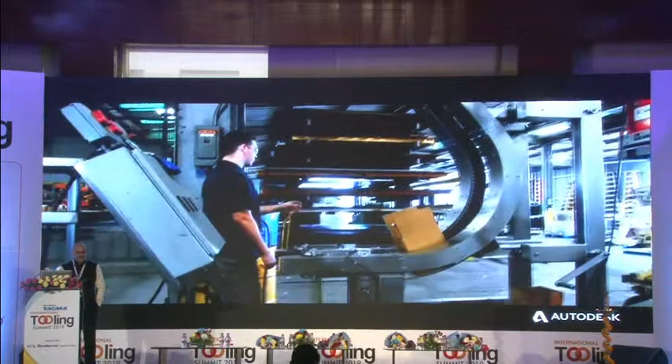So I'm sure if not for my voice, the audio in the video would have woken you up. So now that I have all of you attending to what I'm trying to say, every image, every video that you saw in that piece of video was work done by our customers, on our products. That's the kind of stuff people are doing, and that's what we call our vision, which is helping people to imagine, design, and make things.

And what I'm going to talk to you about today is where this future of making is headed. So ever since man came to earth, I think we've been prone to making things. We constantly are making things, whether we are at home or at work. And if you look at the IT domain, there had been a very simple view of how you make things.

So you have a man, you have a machine, and then you have an output called the product. It was basically a very linear cycle that the product used to follow. Then the product used to retire, and that was a fixed product value for every product. That's how making has evolved. And the output that you get in a linear process is something like what you see here.

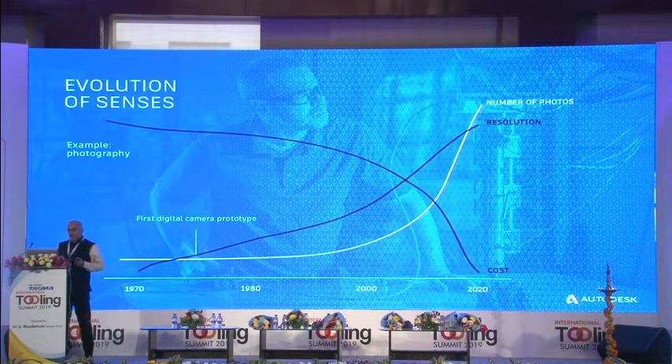But this has all started happening because technology is being forced by the senses, and technology is fast evolving. So basically it is us, the customers, who are demanding this, whether it's mass customization, personalization, smart technology, or synchronization, a real-time feel that we need. That is what is driving all this. And hence, advanced manufacturing, not mere manufacturing, real-time manufacturing is a reality. It's already there, and that's exactly what we say is going to be the future of making.

So what exactly is the future of making? You see this linear product life cycle. When you talk of the future of making, it is cyclical. It's a closed loop mechanism, and that is what companies are heading towards, with each function interconnected to the other.

Basically the product is offered as a service, and constantly you keep innovating based on feedback, looping it back into development, and hence getting a better product out of it. And that's what is happening, which basically results in a much better output, the output which the consumer wanted or desired.

So basically what we are talking about is a platform which has all the elements from design to make to use. It's a platform that companies will adopt, and it will be a closed loop mechanism that will ensure the product is constantly innovating based on what customers are asking for. At Autodesk we call it design, make, and use. That is what our products are moving towards, to ensure customers can leverage it to the fullest.

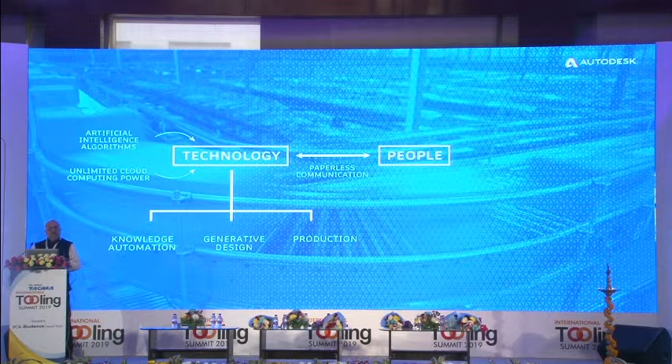So what's generative design? This is the crux of my presentation. In a traditional way of designing a product, a design engineer sketches out a few options and deliberates those options based on what you want to do with that design, how you want to machine it, what's the strength, what the priorities are. But the fact is you're starting with very limited options, based on what that human mind has to offer.

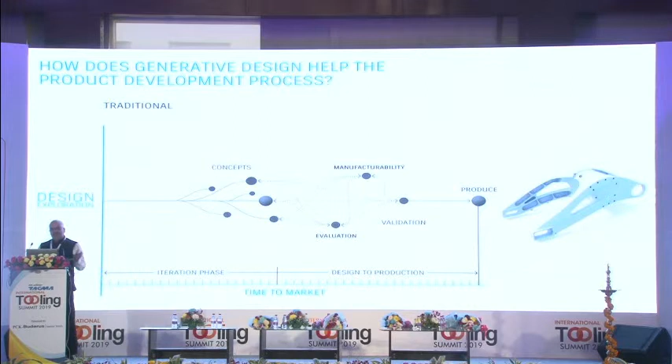And then you have the traditional processes that follow: manufacturability, evaluation, validation, and then production. Now imagine if there is a tool available which throws up thousands of designs based on parameters you have defined - based on material, machinability, temperature, tensile strength, whatever you may want. You define that, and the machine throws up thousands of designs to choose from, and that's where you start.

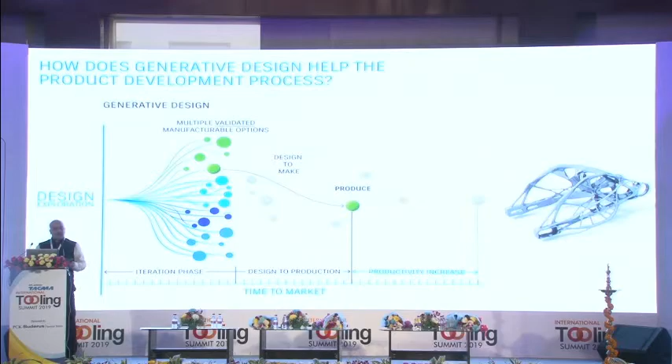And just see what happens on the x-axis: your entire process gets compressed, your time to market goes down drastically, and your efficiency and so on follows suit. So who does this affect? Believe me, everybody in this room, because design is the starting point of any innovation. Design is the starting point of anything we do in manufacturing. So it pretty much impacts all industries.

And how can you make the most use of it? You have to embrace it. And you would say, why is Pankaj saying you have to embrace it? Technology is there, people will embrace it. But the biggest problem is going to be how we look at things, how we change our mindsets, and how we make our customers change their mindsets. That will probably get covered in the last part of my presentation.

So basically, it's all about knowledge automation, generative design, and finally production. I want to quickly show you this is not theory, and I want to show you a case study of Airbus which will drive home exactly what I'm trying to say. So let's go through this case study, and then I'll get back.

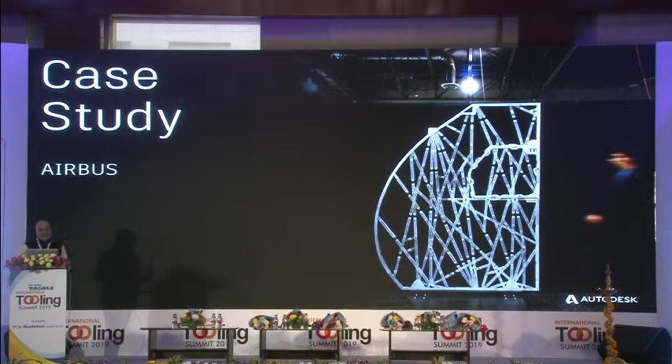This is a comment from a person at Airbus, talking of the design engineer being a design jockey, no longer a design engineer - meaning he has to handle and has the capability of judging which is the best design to pick, because his intelligence now has to move to picking the right design and not designing the right design.

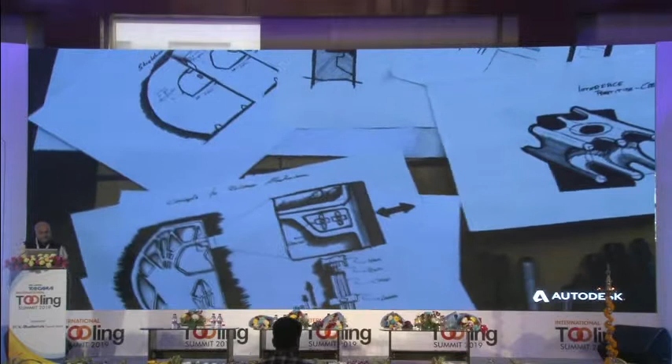We are committed to reduce greenhouse gas emissions by 50% until 2050. This requires us to develop new technologies which make airplanes much lighter. A lot of innovations happen behind the curtain. We have a dedicated lifecycle approach, a very holistic view, not only of the product itself but also the operations and how we manufacture the product. This enables us today to go a new way in airplane design, to use biological algorithms to go into a different kind of direction in how we design and manufacture components in the future, to come up with new design principles, to find out what makes sense in the future.

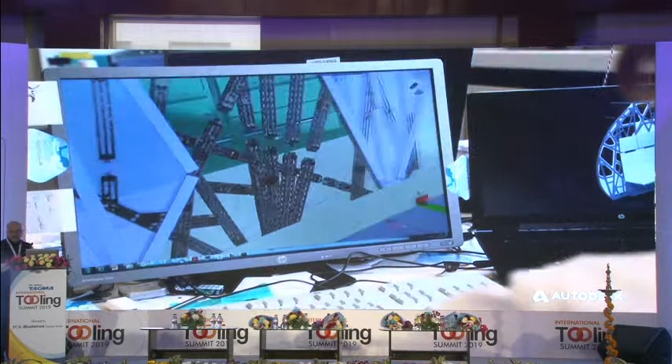We call it bionic. This is what nature has done for millions of years, that we are able to copy nature - I didn't expect that, to be honest. Certainly the bionic partition, as we call it, is also one product which has its roots in the biomimicry area. We have selected one of the most difficult structural components inside the A320 cabin. We can achieve this today simply because we combine generative design, 3D printing, and additive manufacturing. You just say what you want and you will get it from the software.

If you think about the future and our task for the future, the biggest thing means we have to reduce weight.

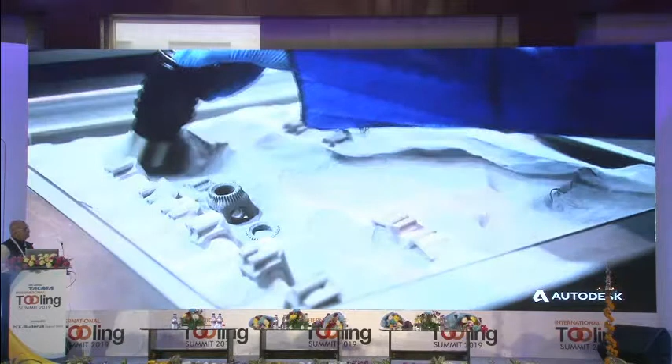With bionic structures, we have a weight reduction potential of 50%. We have up to 95% raw material use, and we have the chance to reduce the production steps by 50%. This is really a very big step for an aircraft builder, and this is just possible with generative design using Autodesk software. If this works, it works everywhere else.

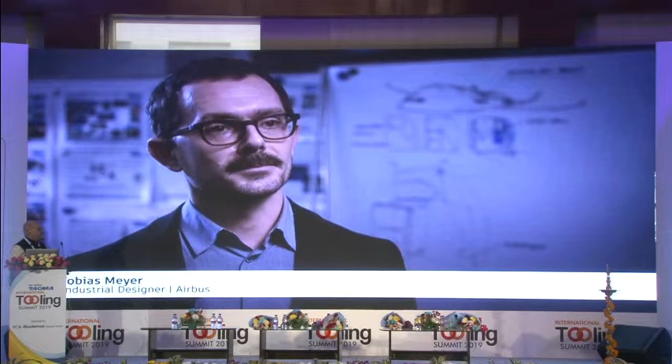Now, step by step, we start to look for more cabin parts and see where we can implement bionic design. I see here the biggest change I've ever seen. We have very long life products, you know. Each kilogram which we design in today costs fuel burn the next 25 years. It helps our customers, the airlines, and it helps the environment.

So just so that, I don't know how many of you caught those metrics, these were the achievements of just creating a partition through generative design. You can see for yourself, and those of you, I mean, most of you are in manufacturing, this is like music to your ears, or I'd say music to your eyes. So this is the kind of savings Airbus achieved by just adopting generative design and redesigning that partition panel which is there in every airplane, right? And all of us know these are the metrics which for the airplane industry matter a lot, whether it's CO2 emissions, fuel savings, and so on and so forth.

What are the main benefits? Very obvious. You have multiple design options. You have virtual global teams operating because this is a cloud offering. And you have a great technology that is kind of fast evolving and unconventional design.

So you would have heard this word constantly in that video called bionic. The beauty about generative design is it does not think straight line. It does not think the way humans think. It thinks the way nature thinks. And hence those structures that get created are inspired by nature. They are bionic in nature. So they might not be the most pretty to look at, but they must be exactly what you wanted it to be with respect to weight, size, pressure handling, material handling, machinability, whatsoever you may want, right? Coming back to what are the main challenges, and that's what I'll cover now, okay?

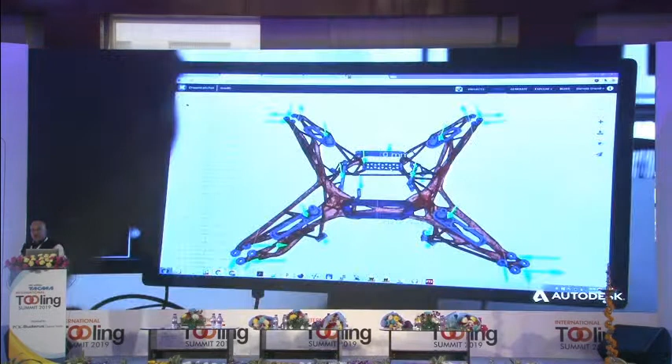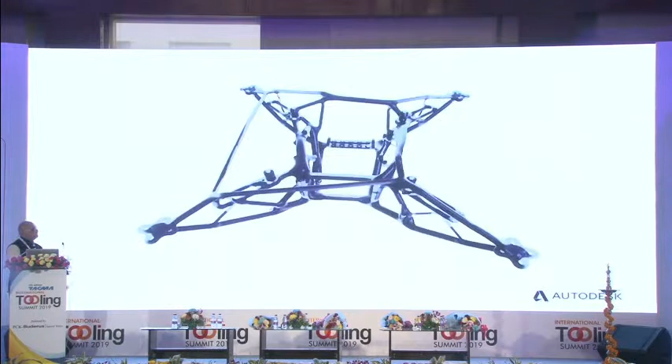But before that, what if you could come up with thousands of generative design options for a single concept, without drawing, all of which meet specific goals set by the designer? And from those options, pick the one design that delivers on the most important criteria, the design you couldn't possibly have imagined. This is generative design, a technology that harnesses massive computing power, creating forms with precise amounts of material only where needed, achieving maximum performance while wasting nothing.

But generative design can be about much more than simply turning out alternatives. Prototypes can be scanned and equipped with sensors that provide real-time performance data that can be looped back into the design process, so the object, in effect, co-designs itself. And depending on the material and method of manufacture chosen, the software can optimize the design for those choices.

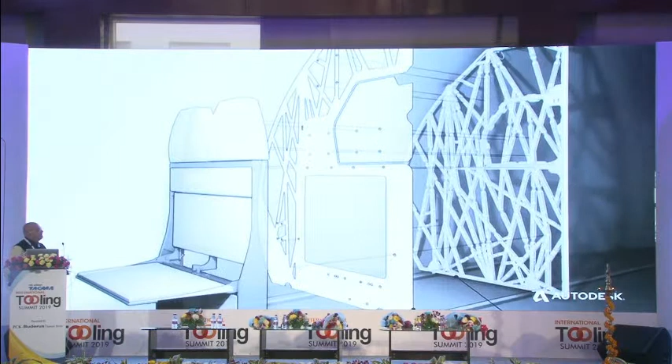In its search for the optimal design, generative design creates complex forms that would otherwise be impossible to make using traditional manufacturing methods. Now, with advancements in material science and the ability of 3D printers to print metal, companies like Airbus can create forms like this airplane partition panel that's half as heavy and just as strong. The result? Significant reduction in fuel costs and CO2 emissions.

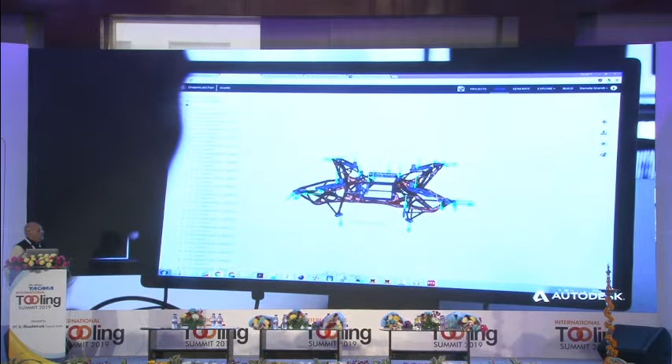The things that have limited us in the past, software, materials, manufacturing, no longer do so. With generative design, the world can look and perform any way we want it to. This is the next stage in the evolution of design, and it's happening now.

The beauty about generative design being that a typical 3D printing driven by an AI robot would print in parts, and then you would either join those parts through various forms. In generative design, depending on the machinability capabilities, you're creating a single structure, which I'm sure all of you would agree is a much stronger structure without any joints or anything, right?

So basically, what are the challenges, right? At the end of the day, it's we who are to use generative design. We as people need to use generative design. And basically, the typical thought that comes in a designer's mind is, is this technology going to replace me, right?

So let me also show you one more case study before I conclude my presentation. This is a very interesting case study of a seat bracket, the seat belt bracket that we use every day. And you should see what General Motors has done with generative design on that.

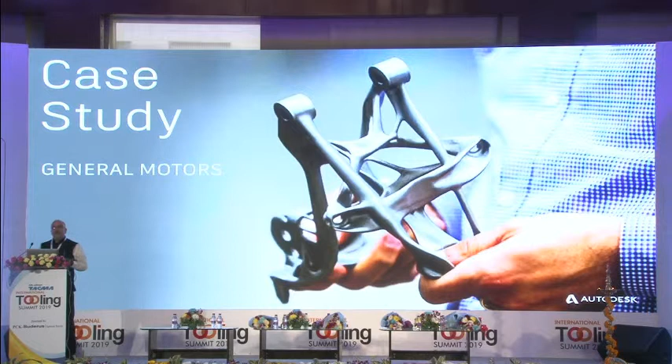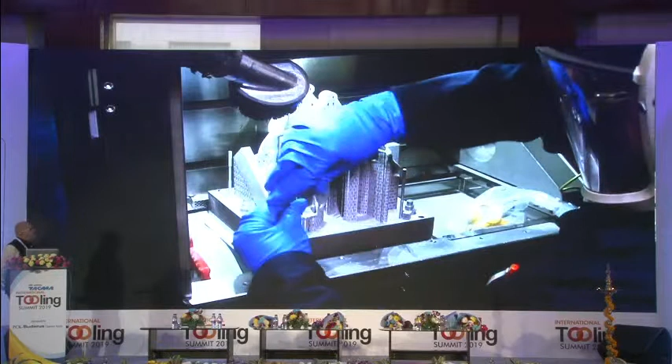There are many different ways to design for additive manufacturing, or more commonly known as 3D printing. One of those ways is generative design. It takes inputs of design constraints, load requirements, keep-out zones where material can't be, and generates thousands of different design solutions working with the software that a single designer or engineer couldn't come up with on their own. It's an expansion of our current capabilities, focused on lightweighting, new manufacturing processes, and designing and making our vehicles in a different way.

Autodesk is one of our valued partners as we go forward in the additive manufacturing space, helping us think differently, bringing an innovation culture, as well as tools for design for additive manufacturing.

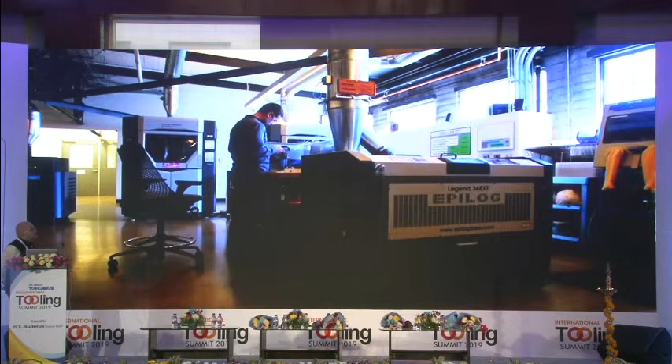One of the first parts we worked on in collaboration with Autodesk was a common rear seat bracket. This bracket consists of 8 pieces, welded and bolted together. We worked very hard to consolidate that part into one piece, something that can only be produced using additive manufacturing. We ended up saving 40% mass, and got that part consolidation from 8 parts down to 1.

The benefit is really being able to explore the design space in a much more efficient way than using a traditional approach. We get multiple designs within a short amount of time, a feasible solution to our problem, which could probably take a normal engineer weeks to figure out.

GM has traditionally always been a leading innovator in the industry, and it's great to see them adopting these new technologies and seeing how it applies to their business and their customers. We feel there are huge benefits today, but those benefits can really ramp up as we move into the future. The opportunities for GM around additive manufacturing are endless.

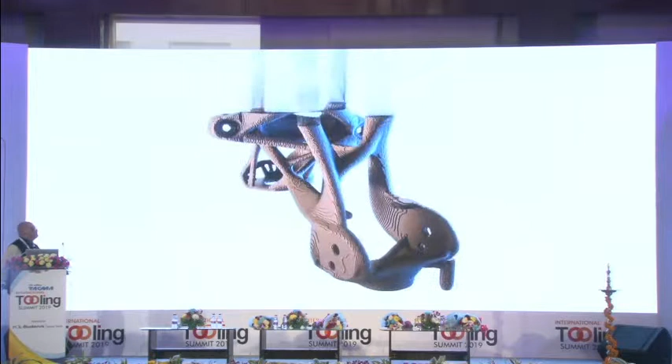I could have gone on and on with case studies. I have one from Black & Decker, and one from another company whose name I'm missing. There are about 3-4 more companies where we've created case studies which really drive home the point that this is a technology that needs to be adopted. And by whom? Believe me, it's pretty much in all the sectors.

Manufacturing is core to most businesses outside of services. So it impacts almost every sector, because every manufacturing process starts with a design which is in your mind, and then you take it forward.

So what are the challenges? The challenge continues to be the mindset - designers feeling threatened, wondering if their job is at risk. Whereas that's not the case. On the contrary, you have to up your game.

You have to up your game of assessing which parameters are the most important, which is second, which is third. Get all the stakeholders to sign off on that, because the rest the tool will do. Once you've defined your priority - say stress handling is my number one priority - you will only see those designs which have high stress handling capabilities, and then you need to pick one from that.

So apart from changing the mindsets of our employees, we have to change the mindsets of customers too, because even customers think in a straight line. Customers haven't yet started thinking in a different manner. But if you give customers this awareness and this option, maybe they will challenge you to come up with better designs.